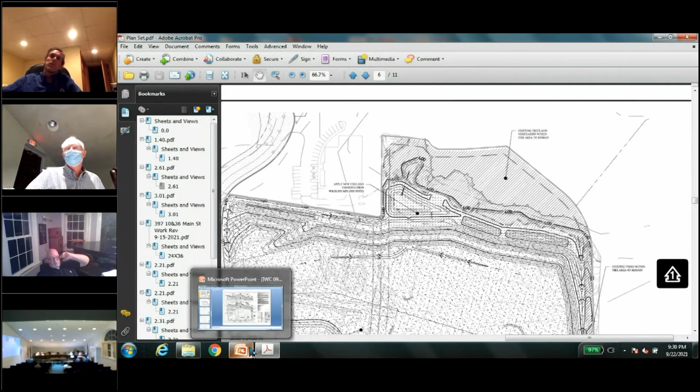Okay, do I have any comments on the submission from Bill Kenny? I'm good.

I have one, and that is that it's only a soils report. It's not an assessment, and it won't tell us how this development will or will not affect the wetlands, unless you have Bill online that we can ask him.

He's finishing up a presentation in Greenwich. He'll be on in a few minutes. He can certainly speak to that. He's reviewed the application again, just to note, we only have less than 1 acre of activity in the upland area.

That area was previously disturbed and paved. I would argue that this application actually is a great improvement over what's out there today, because all you have now is asphalt and uncontrolled debris and material placed without, from previous ownership, that has no water quality measures and has no sedimentation basins or traps, and does not do anything to address the heat island effect of all that asphalt and that increased temperature of the runoff that runs uncontrolled into those wetland areas.

Our application proposes to disturb some upland area, essentially within the limits of the existing disturbance of those upland areas, and provide adequate sedimentation and erosion control measures to allow for the site to be filled to accommodate future development.

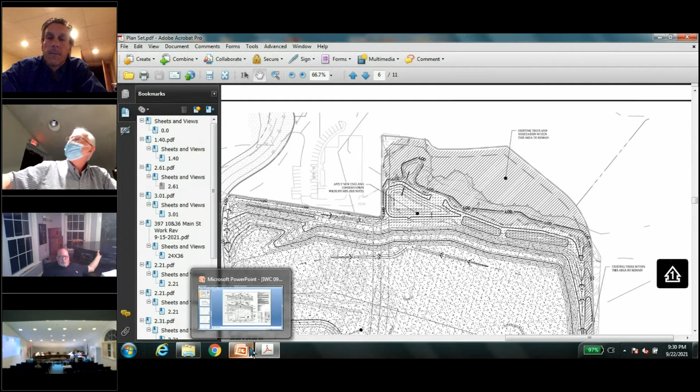Share our screen. It says that you're still the presenter. Let's see if I can. Maybe it's the wrong screen. Let me change, hold on one second.

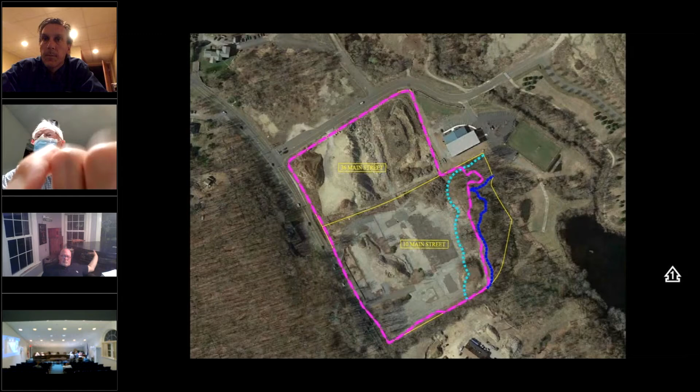Okay, good. Sure. So as Commissioner Hawley may be aware, 5 Victoria Drive is just to our east. So there is a wetland system essentially that is split between 5 Victoria Drive and our property here. So we have a wetland system here beyond our property on the eastern side.

There's actually restored and mitigated wetlands through a turtle pond and such in this area. Then there's an upland area, and then there's a pond, and then the west branch of the river.

That brings it into perspective. I'm familiar with that now. I can see right where it sits. Critical piece of land, though, as a buffer against the river and the other pond. That was my only question.

Anybody else have any other questions while we're waiting for Bill Kenny? Nope. Okay. Yeah, thank you. I think even I'm all questioned out.

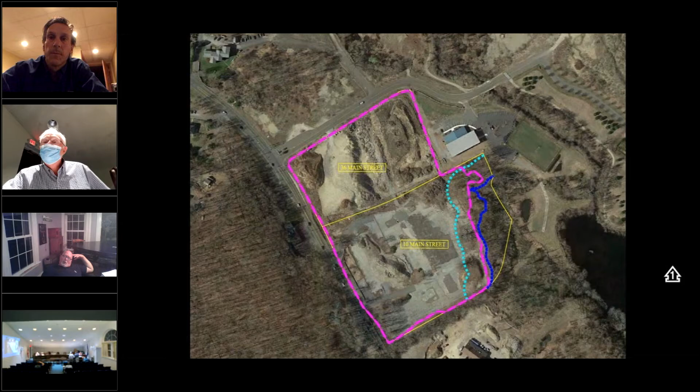How long do you anticipate the filling, and how long before you anticipate a site plan to emerge? We're hoping that emerges in the next 6 to 9 months. The length of a fill permit from planning and zoning is essentially a 2-year permit duration, but we hope to be in with the formal site plan application well before that. Like I said, 6 to 9 months, if not sooner.

We actually have a couple of interested parties and a really good team working with some potential tenants, so hopefully we'll have more further progress. I do think Bill is trying to log in, or will shortly. He just got back in front of his computer, so.

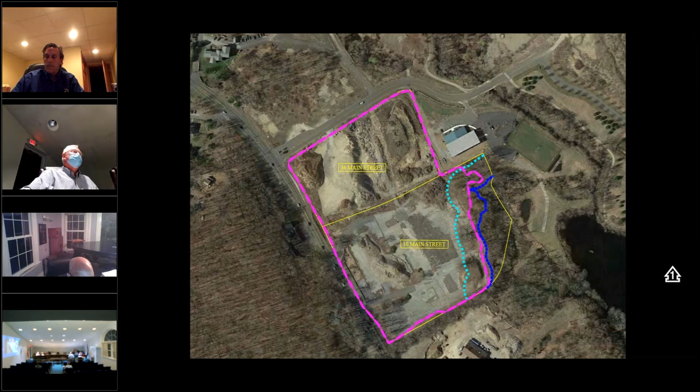Would you like to talk about plantings around the outlet control pipe and level spreader while we wait for Bill? Sure. I think what we'd probably recommend is planting 4 trees within that area, surrounding the outlet pipe and up to the edge of the detention basin on the eastern side. Our landscape architect recommended birch, serviceberry, or oak. Maybe we could do 2 birch and 2 serviceberry.

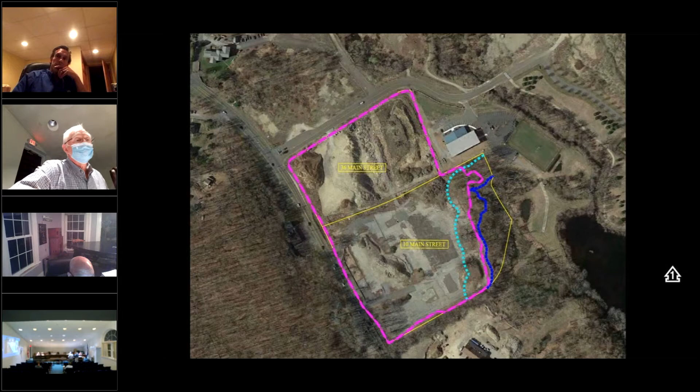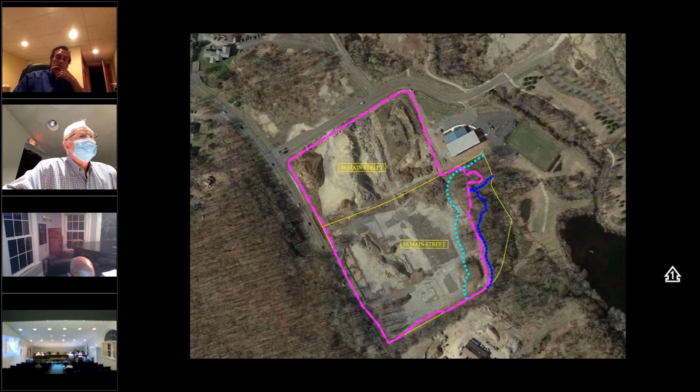I'm looking for my notes, I have notes around here somewhere. It's a relatively small area, so I think that would be more than adequate.

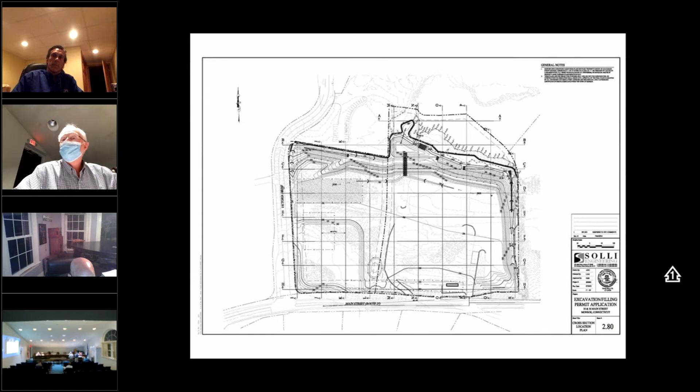What size were you recommending? We'd be getting native sizes, so those are generally smaller. But let's see if I can get that from my landscape architect. How tall does serviceberry get? 15 to 25 feet.

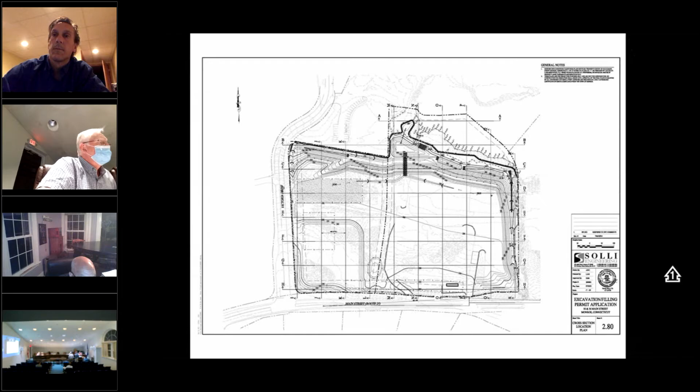So Kevin, what were those trees again and how many? Birch and serviceberry, 2 of each. And don't laugh at me, but I was going to recommend using oak as much as you could.

The reasoning being, and this is where the laugh part comes in, there's an explosion lately of the jumping worm, also called Asian or crazy or snake worm. They're devastating forests, devastating gardens. I have them in my yard, ruining a lot of my plantings. They don't like oak leaves, but they do like all forest understory, which is what I was trying to think about with the bike trail. They're all over the bike trail and will completely destroy any underpinnings, everything. So whatever we can plant that they don't like is better.

How about 4 oak trees? I love it. Go for it.

And I just want to say one more thing while Bill logs on. I know this commission, you aren't trained professionals, you're volunteers elected to these positions, and I don't want you to do yourself a disservice. This commission is a very good commission. Ms. Spence, your tenure on this commission gives you more experience and credibility than any other wetlands commissioner I've been before in any agency I've presented to. I wanted to make that point because I don't know if a third-party peer review is really going to teach you anything about how to look at this application. For what that's worth.

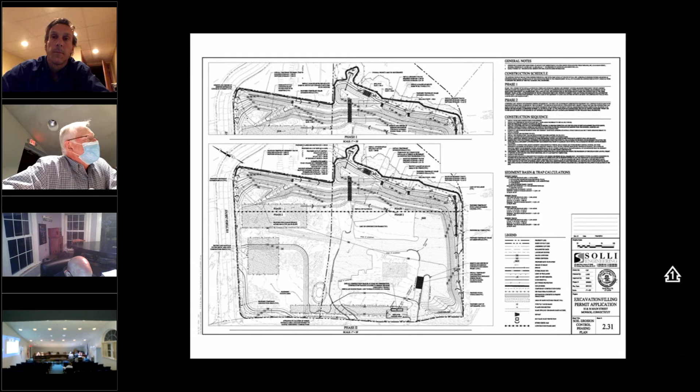Go. There he is. Hi, Bill. Good evening.

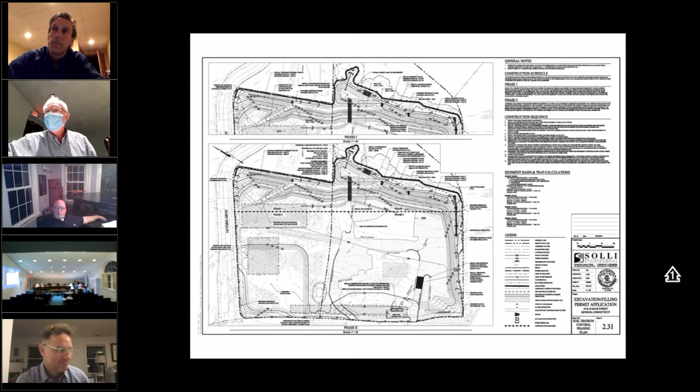Time to switch gears quickly. Yes, I was just left a hockey rink proposal in Greenwich in someone's backyard. So, jeez. Oh, there you go. Nice, all right. Any commissioners have any questions of Bill now that we've dragged him away?

Bill, since we don't actually have a written wetland assessment report, we are requesting what you feel will be the impact of this development and the changes being proposed on the wetlands around it.

Okay, I'll give you my overall impression. You're correct, we have not prepared a written report regarding potential impacts to the wetland, but we were on site, we flagged the wetlands, and I've taken a look at the drawings. First, let's talk about existing conditions and then proposed conditions. Certainly the property is a disturbed property, formerly developed, with quite a bit of existing impervious surface that extends close to the wetland, with fill beyond that to the wetland's edge, particularly in the southeastern corner of the property.

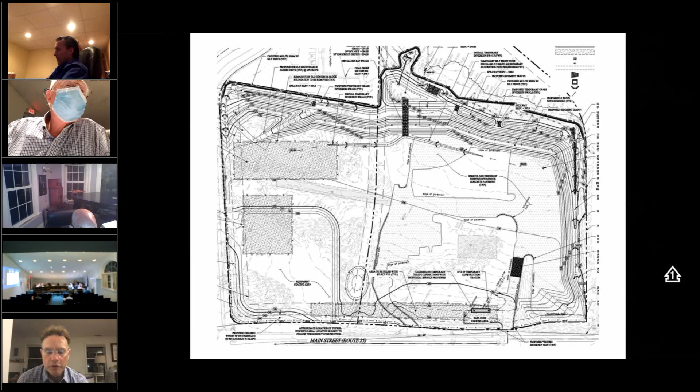Is it something that would be advantageous to be removed? There are certainly some species there that, with the work proposed, anything within the footprint of the development will be removed and controlled through the development. Between the edge of the development and the limit of disturbance, I would focus primarily on vines that are growing and potentially impacting the trees. I always like to focus on vines in a forested area, because keeping a forested buffer is of great value for the shade and so forth, and vines have the potential to significantly damage that, converting the area over time into a shrubby environment rather than a forested one. So at a minimum, I would control vines posing a threat to the health of trees in that buffer, both existing trees and any planted in the future.

And the applicant's happy to accept the condition to remove invasive species through the area and provide reporting on monitoring? Yep. Thank you, Bill. Does anybody have any other questions for Bill? I guess not.

Okay, I have one more for you, Kevin. I'm still on 221. There's a large area of what appears to be open area between the 300.5 contour and the LOD. What's going to go in there? Nothing. As you can see, there's this thicker dashed line running through that area - that's the limit of the 100-year floodplain elevation. We're trying to avoid placing any fill within that area, so essentially we're not proposing any activity within it. So why is the LOD so far in? We have to tie in one contour, which is actually removing some of that material - it's a slight excavation within the 100-year floodplain, to clear the area out so we can restore it, and maybe add some additional tree plantings there.

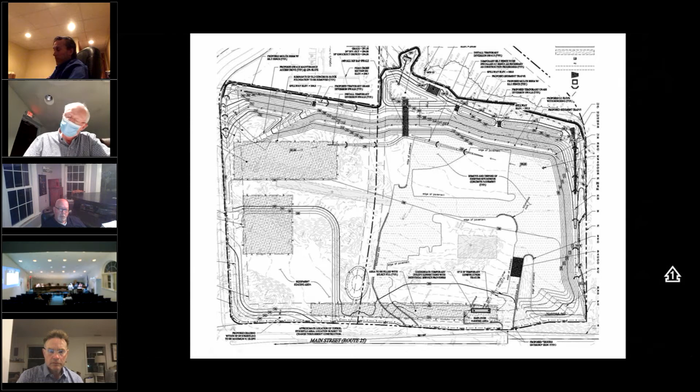And so before you plant the trees and stuff, you're going to put conservation mix or something? Yes. Is that on the plan anywhere? Yeah, that's part of the plan set. Okay, but with the understanding that it will be more heavily vegetated and treed when you bring in new site plans? Yes, that's correct, certainly.

I don't think I have anything else. See, I'm not impossible to work with. I just make you put you through your paces. I didn't say that for my health report. It's true. Okay, I think I'm done.

Does any commissioners have any other questions? I have no questions. Okay, I'm going to open it to the public. What, Clark? No question. Ross? Thumbs up. Okay, can I open this to the public then? Is there any members of the public in the audience or online that would like to speak in favor of this project?

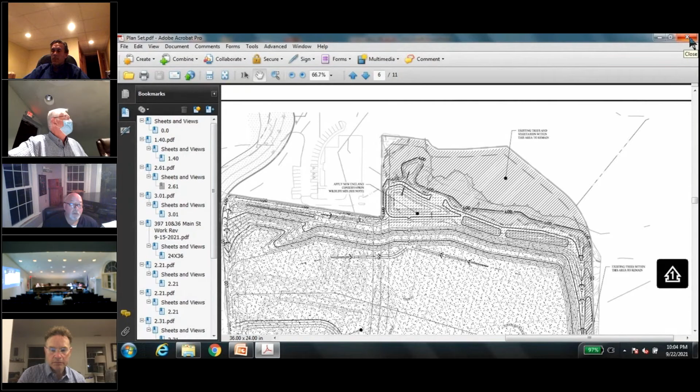Unless anybody - does the applicant have anything further to say? That is it, thank you for your time. We appreciate it. So, okay, then we can close the hearing. Thank you very much, everybody.

All right, so next we have deliberations on hearings from tonight. So let me see, this deliberation session is only on 10 and 36, because I didn't announce this last time, so it was IWC 2021-11.

10 & 36 Main Street, excavation and fill application. So I move that we have the staff put together a motion, a draft motion of approval with the trees and the...

Removal of invasive species - is that, can we be specific enough? Yes, that was it, as offered. Inclusion of reverse slope benches.

Wait a second, it was 4 trees. Yeah, oh yeah, because we got jumping worms now. Hey, look them up. You want to see something really scary? Oh, you know, when could it - good. Tomorrow there'll be something eating the oak trees.

Surprised these days - removal of invasive? Yeah, yeah, the removal especially of vines, invasives. Concentrating on the vines, and monitoring. Monitoring is standard, but yeah.